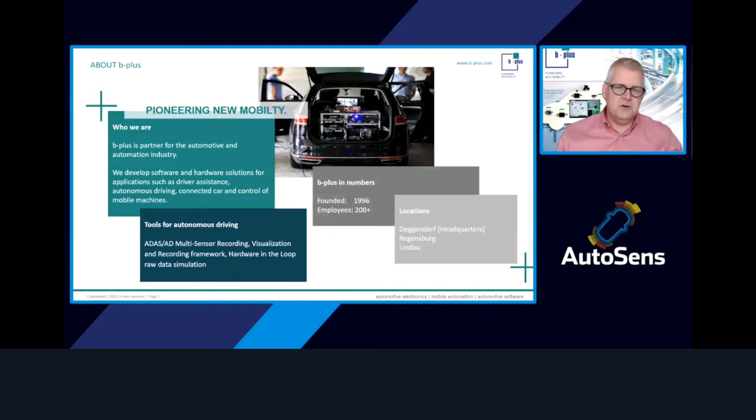Looking into autonomous cars in general, there's a lot of stuff going on. I put some pictures out there which give an overview of what is happening in this field. Recently, due to COVID-19, some of those activities have been delayed or stopped. But in the end, all the major tier ones and OEMs, as well as some technology companies and some very good startups, are working in this area to address a market which is still a couple of years down the road, and we'll see things coming up pretty soon on the roads. We also see them already on the roads, and the basic technology around that is a lot of sensor stuff.

We will see that in a minute, but a few years ago, companies started to bring up some examples of so-called autonomous drive platforms. This goes back about 2 years now, and the examples I have here are not the most recent. There are more things coming up now. Things have been delayed or taken away again from the market. But anyway, these kinds of technologies are out there in the market.

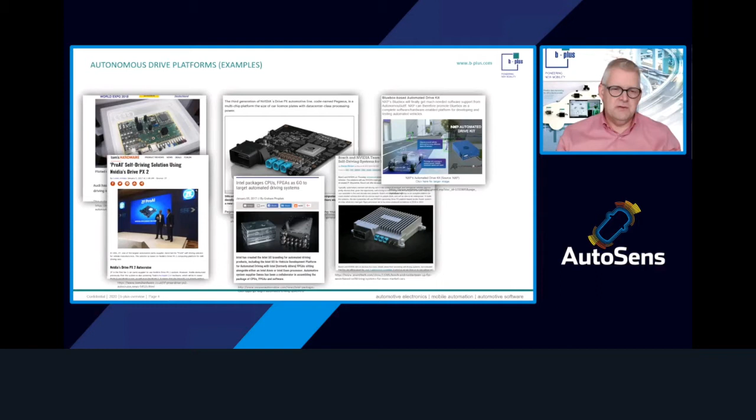Looking into autonomous drive platforms as well as autonomous cars, the major thing relevant for autonomous drive development is the sensor equipment. I have a sample configuration for you here. This is a sensor set which we have also mounted in one of our test cars here in Germany. We work with a set of cameras and radars as well as some lidars. This is quite common to all the cars you have seen in the previous slides. There are a lot of sensors for environmental detection, for the cognition of the environmental model.

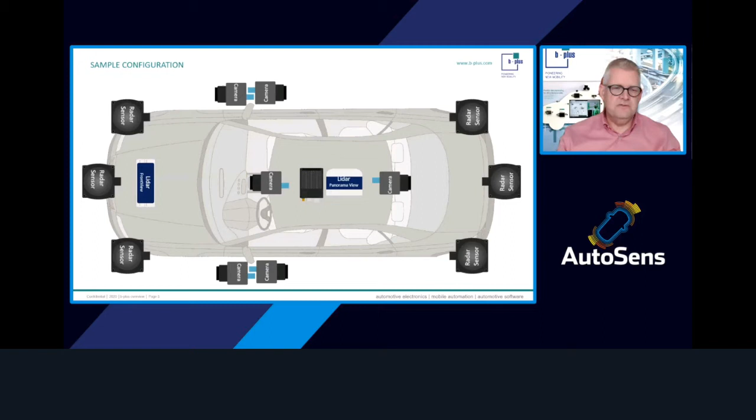There has been a lot of development going on, especially in those sensor fields. When I look back to 2000 and 2001, when we started to work with the first camera developments, compared to today's raw data sets we had very little raw data. Nowadays, in this example setup, we have 6 cameras and 6 radars on this car. That's 58 terabytes per 8-hour test drive shift. So a lot of data is generated there. Not all of that is really relevant for the training of artificial intelligence at the end of the day.

But in the majority of cases, our customers tend to capture as much data as possible in order to have the right data sets available. Well, looking into that, there have been a lot of discussions around the amount of data being generated. There's a lot of discussion around what kind of resolutions and how many of those sensors are necessary to really do a reliable and safe autonomous drive platform or autonomous drive vehicle at the end of the day.

But what is common to all of those is basically we are now talking about a data-driven development, looking into neural networks, artificial intelligence, machine learning, all these kinds of topics which are in common, of course. They need accurate data for the training of those models, for considering various scenarios, finding out corner cases, getting enough overview on weather conditions, traffic situations, and all these kinds of things.

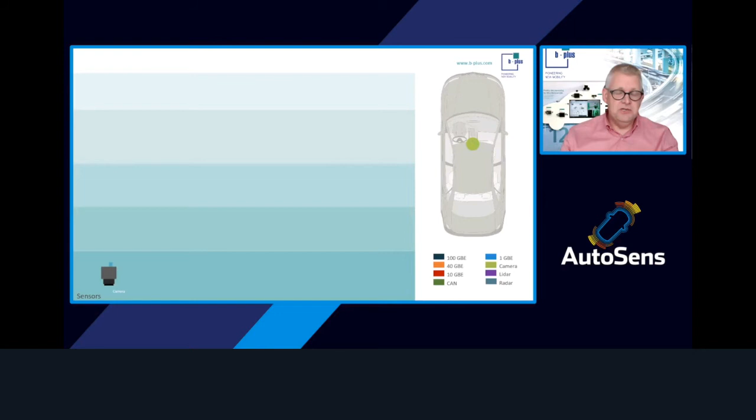And nowadays, of course, we take those sensors, which usually are sending out an LVDS or serialized signal. We convert that with these kinds of interfaces into a generalized 10 gigabit Ethernet link. And at the end of the day, it ends up on one of our recording setups or recording systems, where we store that data locally on one of those cartridges, which sits on top of this device.

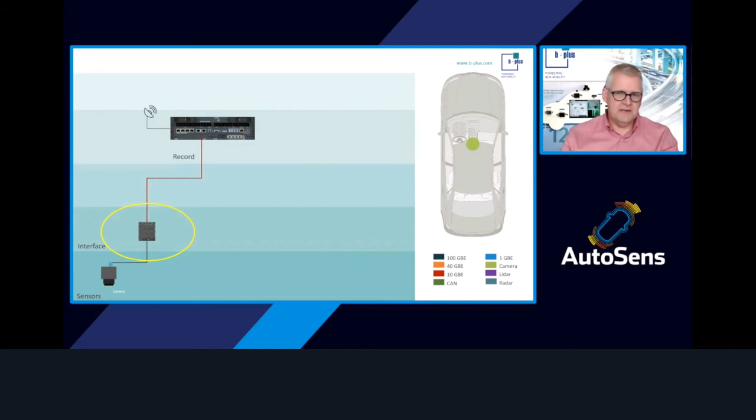Well, usually the most critical path in this case, and what I considered earlier in terms of time synchronization and securing the data or data integrity monitoring, how does that work? Let's have a deeper look into that. Well, a simplified view on this device is pretty easy. You have an interface on the left side, which is capturing the serialized signals coming from the sensor front end, no matter if it's camera or radar. We do projects on both of them.

The main thing around that is we first of all have to get the data into the system using a deserializer setup. Once we have done that, data is being forwarded internally, of course, and every packet is time-stamped. So every one of those packets now has a timestamp.

We still need to check integrity, so we put CRCs on top of that as early as possible in the chain. Once this is done, all the packets are put together in larger UDP packets, and at the end of the day, it runs out to the recording setup, to the recorder.

Putting some additional sensors into that is quite a simple task in this case. We just add them, connect them to the recorder, and we can record that data additionally.

Usually this is not enough for a test setup, of course. In many cases we have to add radars, no matter if it's near, mid, or long range radars. We put a set of radars in there. In this example, they're connected through CAN interface, so they send out object lists, and we capture this through the CAN interfaces. Together with the camera, the LiDAR, and the radar, we get a good picture already about the environment in these specific scenes.

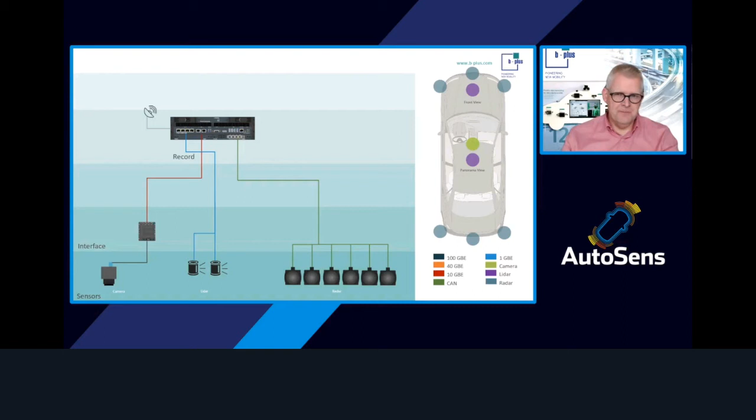However, this is still kind of a very easy setup. Let's add additional cameras into that. What does it look like? We need an additional measurement interface. We still have one recording platform, which can store up to 64 terabytes at a maximum. And with that, we can really stand one day of recording easily with this kind of simplified setup.

If we need more, we're just adding more cameras. We add a new second recorder. Once this is done, we also have to make sure we put the time in correctness, which means all the recorders need to have the same time basis. And for the sake of data distribution, we put an additional switch as well into that.

It's not really mandatory for that, but we'll do it in this setup. So once we have that in place, we have a time-aware switch. We have 2 recorders, we have 6 cameras, we have 6 radars, we have 2 LiDARs. So it's pretty much what we saw in the example earlier.

Now we have this test car being equipped with a recording setup. It works pretty well, of course. But there is some kind of maintenance or remote access desired by many of our customers. So we add an additional component, a fleet management connectivity solution, which enables updates over the air or remote monitoring of the car, the equipment inside, the measurement equipment especially, putting new configurations in there, whatever it is. A driving campaign management, sending messages to the driver, is also in there.

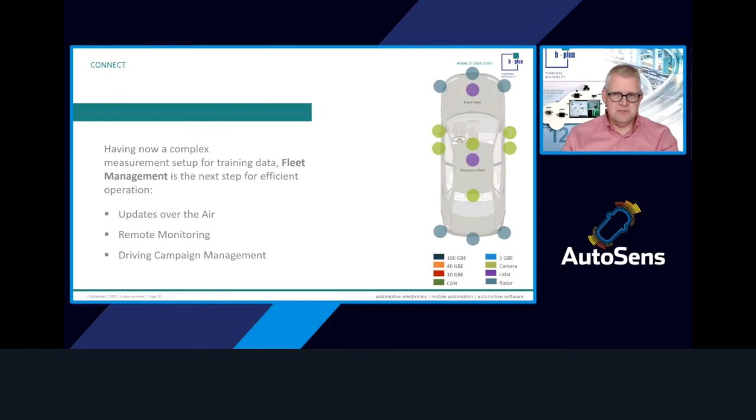So we add this layer for the connectivity. I talked about this topic like online data handling inside the car for the sake of algorithm prototyping or drive scene detection or automated labeling. For that purpose, we put an additional node into this kind of setup.

The node is a compute node, a very high powerful PC platform using multiple GPUs and multiple CPUs. No matter what the requirements are, this is all configurable, of course. And now we have a very good recording setup. We have a decent compute unit in there, so we can do a lot of things in the test vehicle, running the data. We can even use the data already for AI models inside the compute unit because we're running GPUs in there.

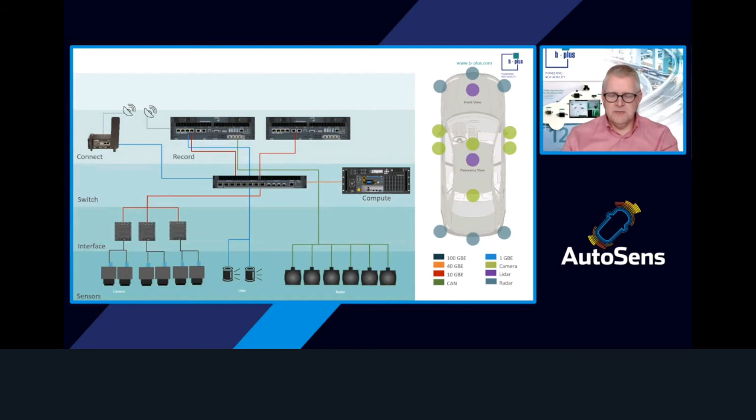So we can add some functionality even in the very early stage of a development phase for the algorithm. Now we have 2 recorders, a compute unit, and a connectivity device in place. We might want to have a central point for storing all the data. So we basically add a mobile data lake, a so-called MD Lake on our side, which is offering the highest performance with 128 gigabit per second. And it also reduces complexity during the recording and during the ingest at the end of the day. Adding that on top of that really completes the setup in terms of the hardware layers we have in this kind of scenario.

Of course, there's an additional use layer, we call it, for the software running on all these different devices, for handling the big data streams, for capturing or sorting the frames coming from the various sources, or even offering a clustered recording service, which means all of those recorders have one trigger for recording, or they have an automated trigger for recording no matter what. And it's being stored on the devices.

The handling is quite straightforward, using a tablet for the driver, for instance, or using the software on top of any kind of device. It's really a flexible and tailor-made setup.

Basically, all the Aveto measurement setup, as we call it here, is flexible, modular, and future-proof. You can start with a small setup and even extend it over time, because this is a usual approach—more sensors coming in, and these things are growing.

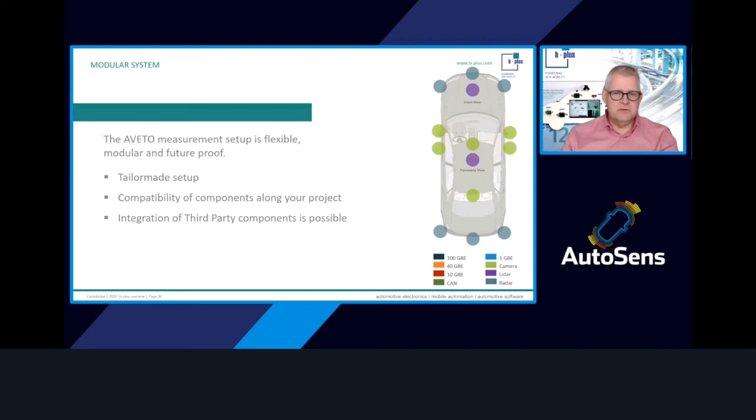This is not a problem at all, because the flexibility and modularity of the system gives a lot of chances for integrating custom sensors, integrating recorders from third parties, even getting away from all the recorders and using third-party devices, while still integrating a switch, a mobile data lake, or even the compute unit. And of course, there are a lot of software tools out there which are widely used.

These tools put together all the things at the customer's end of the day and integrate into the customer's development chain. So it's not really easy to change that, but we do have flexibility to really integrate it.

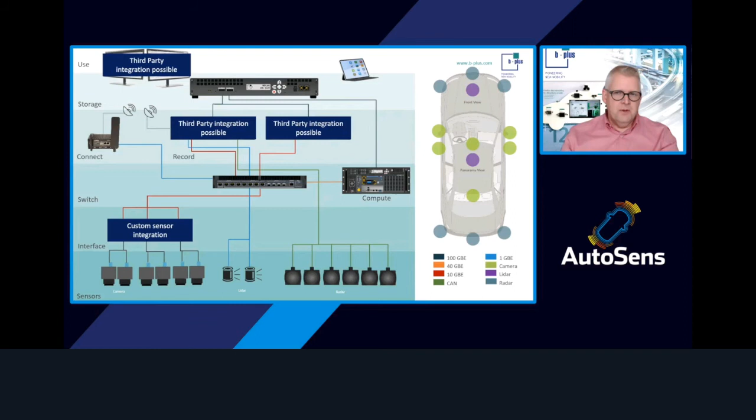At the end of the day, once we've captured all this data, we need to take care of how it ends up in the data center and how it works with training that artificial intelligence network. If we look into that setup, we basically approach the data centers at an edge node.

We call them copy stations or copy links in this case. Those devices are at the edge of the data center, or even at the co-location space.

We've had talks around that as well with some data center providers like NTT, and we work a lot also with companies like IBM. So there's a close link to those data center and IT people as well.

If we look into that, the classic approach would be: we take out those cartridges, bring them into the data center, and copy them to the data center's servers. The good thing with this mobile data lake is that we don't need to take care of multiple sources.

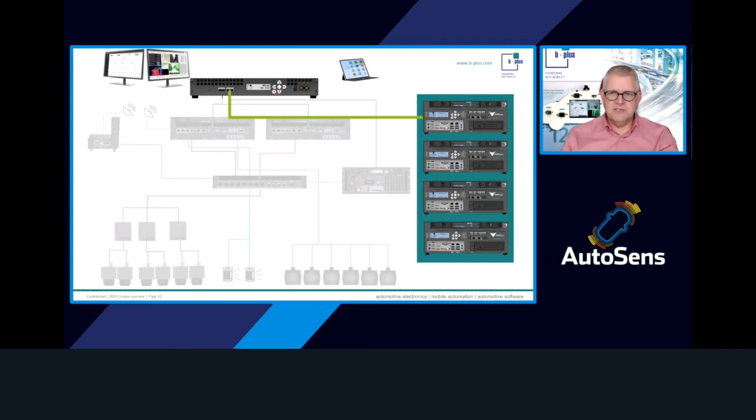We just have one device, which we either take out of the car and bring to the data center, or we have a 100 gigabit Ethernet connection going into one of those copy devices. From there, the data ingest happens, secured through hashes, into the data center, into the servers.

From that point on, this is where I always say the magic happens. The data is being processed there, tagged, meta information is enriched—all these kinds of things happening in the data center or even in a cloud environment. There are a lot of players out there also offering that.

At the end of the day, the data which is enriched is used, as I mentioned earlier, for training AI models, or even for classic corner-case tests in classic algorithm development.

Once we have that done and the model is trained, or we've developed our own algorithm, or the customer has developed their algorithm, finally we go back into the vehicle and put that onto one of those drive platforms—for instance, for providing a drive functionality, or an intelligent camera, or a LiDAR setup with additional functionality.

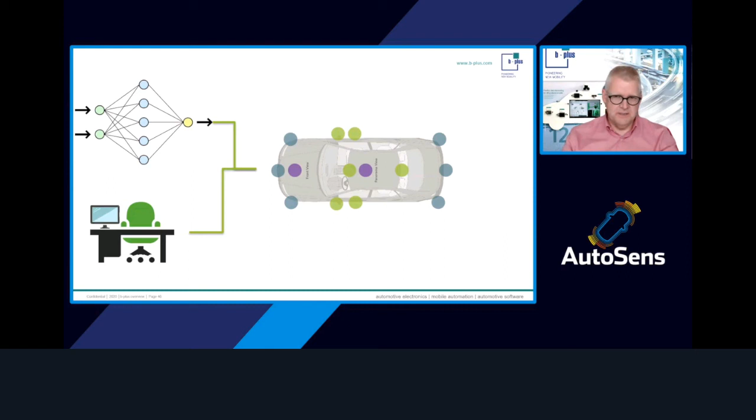So once we look into all that, we've seen that the setup looks quite complex. However, it's made for integration of third-party components. It's made for using a technology that's given, since we do everything on Ethernet, which is possible, and we use Ethernet time synchronization.

So there's a really good path into technology which is given in the IT world—a seamless integration into the IT world. Looking into the car or into the data center, we do combine things there.

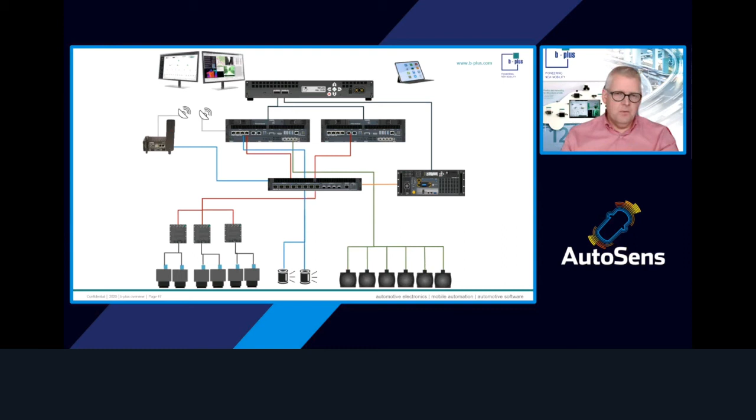Well, as a summary, and this is the end of the presentation basically, we have to think about a global and flexible time concept for gathering reliable data. We need flexibility in such projects, ranging from 1 gigabyte per second, where we started about 4 years ago with this kind of mark, to now 16 gigabytes per second. We also see that customers may not want to store 16 gigabytes per second permanently, but they have the majority of sensors providing this kind of bandwidth, so for a given time period, they need to store that 16 gigabytes per second.

This is what we then call intelligent logging. With these kind of AI topics inside the vehicle, like the compute unit, you can even understand what data is coming in, and you can get your scenarios captured the way you want them to. We do the check for integrity of the data transfer in every step, even up to the cloud upload or the data center upload, and we flag the errors during the recording.

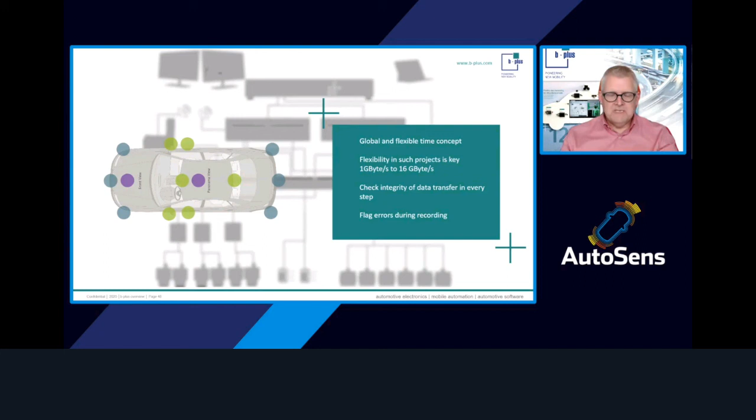Basically, this was the overview I wanted to give you in terms of AI training data and how to get reliable data out there, what is the complexity of these kind of setups, what is the ease of integration of third-party components, and how modular is the system. Thank you very much for your attention, I hope it was interesting for you. At the end of the presentation, we will go to questions and answers. Thank you very much.